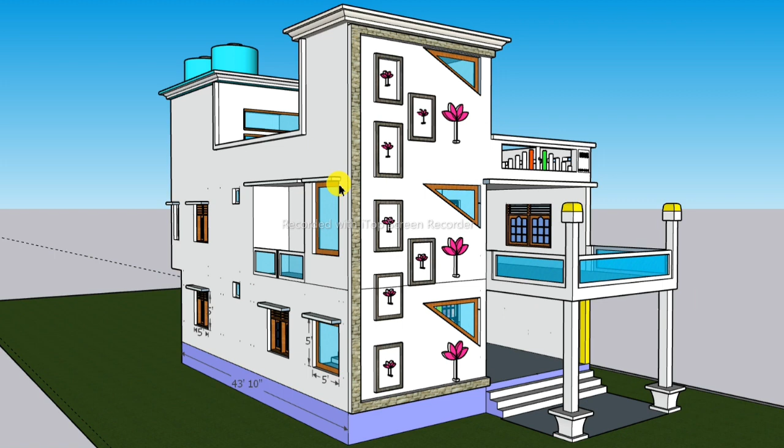It's so beautiful, so elegant, just looking like a wow. It's a G plus two story project consisting of modern residential 3 BHK spaces with all basic amenities.

Let me show you the internal amenities and dimensions of the house. This is the kitchen, and this is bedroom number one. This is bedroom number two, and this is bedroom number three.

The dimension of this kitchen is 7 feet 1 inches by 9 feet 2 inches. Bedroom number 1 is 16 feet 3 inches by 13 feet 2 inches. Another bedroom is similar to the first one. The dimension is a little different for this bedroom: 15 feet 11 inches by 12 feet 0 inches.

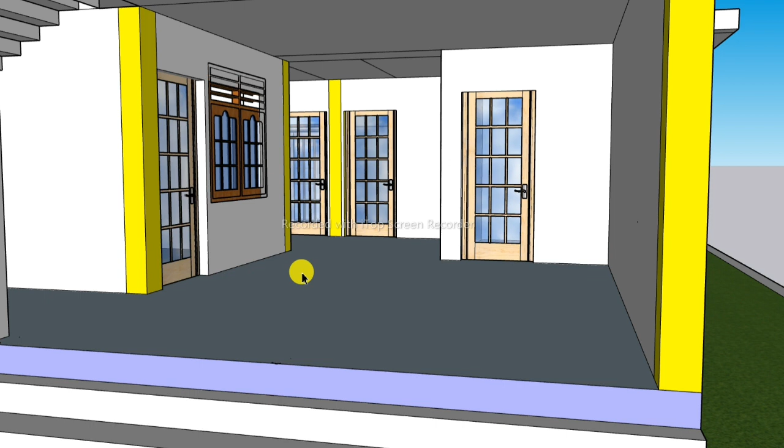And this is the staircase area. Inside the house there is a washroom, toilet, and everything provided with basic amenities.

Now I'm showing you the external surfaces of the house, which looks like that.

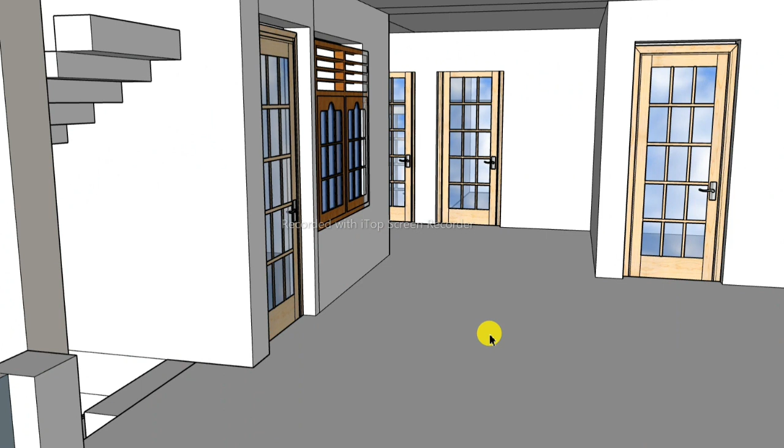Now I'm showing you the first floor plan, which is similar to the ground floor plan, right?

Now you can visualize the side view of this house with the window sizes. The size provided is 5 feet in length and 5 feet in width. For the veranda and balcony, the window provided is 8 feet by 5 feet. And this is the side window for the balcony, 5 feet by 2 feet.

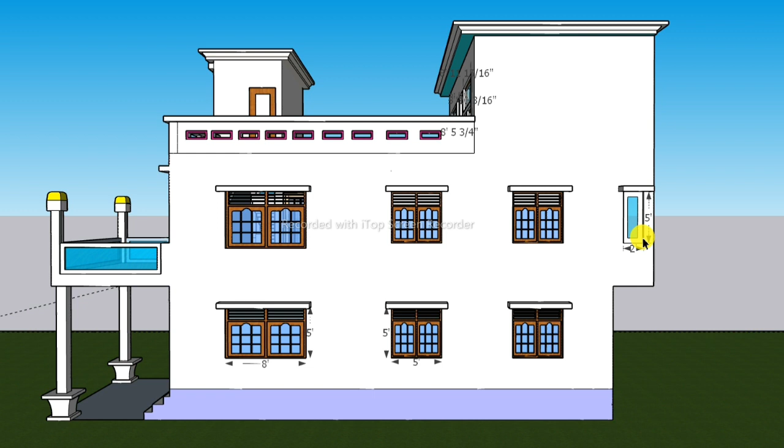I'm showing you another side view. The window size provided is the same for the staircase and for the bedrooms as well.

Now I'm showing you the visuals from the corner view. You will have this balcony, and this is the front elevation of the house.

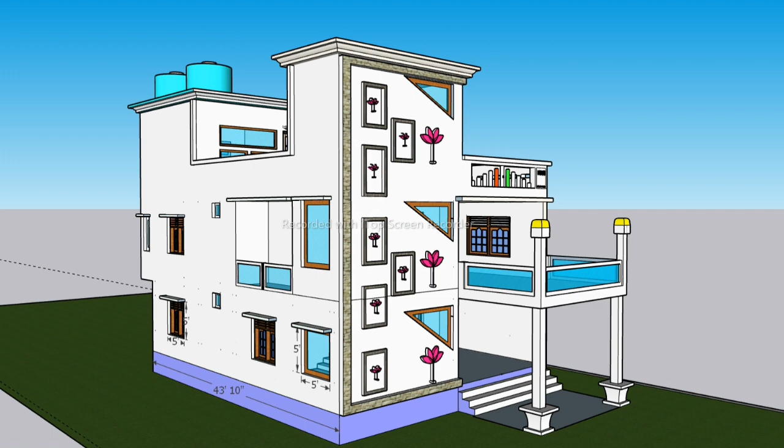Now I'm showing you the top floor plan, meaning the second floor plan. There are two bedrooms with crystal clear windows. The size of the windows is 8 feet by 5 feet, and the door is 3 feet 6 inches

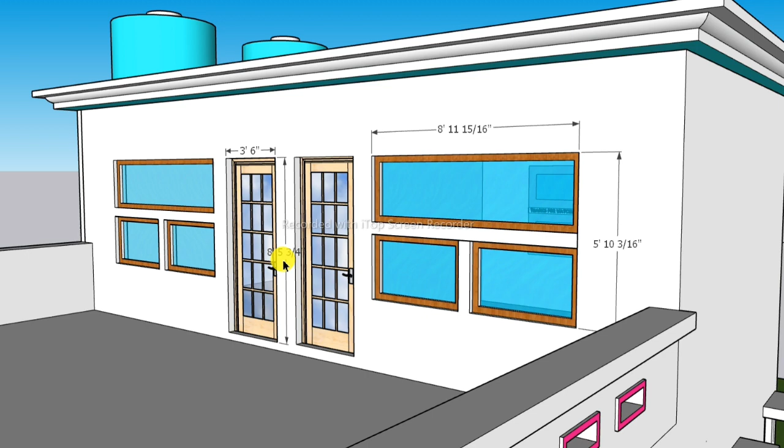by 8 feet, right? Now I'm showing you the backside balcony provided for roadside visuals. The width of this balcony is 4 feet so that the inhabitants and members of the house can easily stand and watch the road visuals.

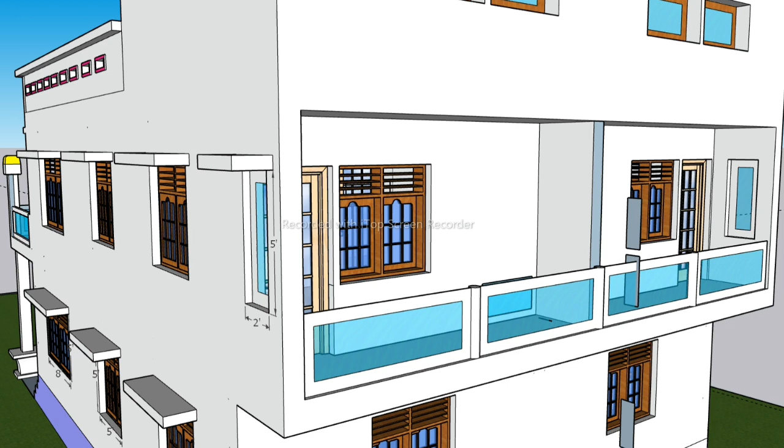Now I'm showing you the parapet design with tri-color as the pride of the nation. The name of the owner is Mr. Nawab Jagir Basti Bhagbaisa.

Now it's time to show you who has designed and drawn this: Mr. Abushad Jahangir. So thanks for watching.